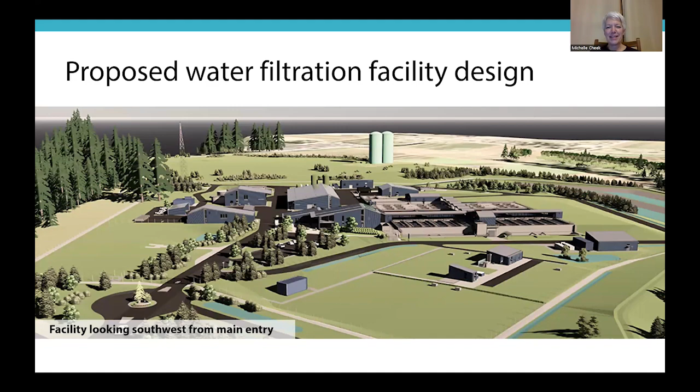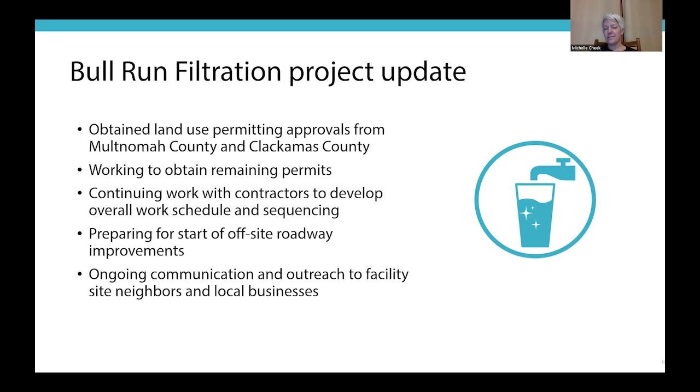And finally, we're committed to sharing information throughout construction, and we'll continue ongoing communication and outreach to keep facility site neighbors and local businesses informed about upcoming activities. So with that, I'll turn it over to Ben unless there's any questions. Cool, thanks, Michelle. Can we get that next slide, please?

So the beginning phases of construction, right now for the pipelines, you as neighbors probably won't see too much activity specific to the pipelines project, but for the filtration project in general, you will start to see some work happening out there. But specific to the pipeline construction, some of the things we're starting on now, we're going to be working with the utilities out there, such as PGE and Ziply and various other agencies, to identify where their existing facilities are, to confirm that there are no conflicts with our proposed pipelines route.

We'll also be completing some improvements that are described in the land use permit conditions of approval. One we're dubbing the Fix It First roadway improvements.

Sorry, can you go back to that, Aubrey? Sorry. Yes, sorry about that.

No worries. The Fix It First is, I'm sure everyone here has the land use conditions of approval. Within them, we agreed to start work on some of these roadways that are not up to standards to be able to handle construction traffic, as well as trying to improve the roadways before we get out there and do our work. And the other first set of improvements is the Carpenter Lane roadway improvements. That's probably the most visible thing the neighborhood will see as we begin our construction.

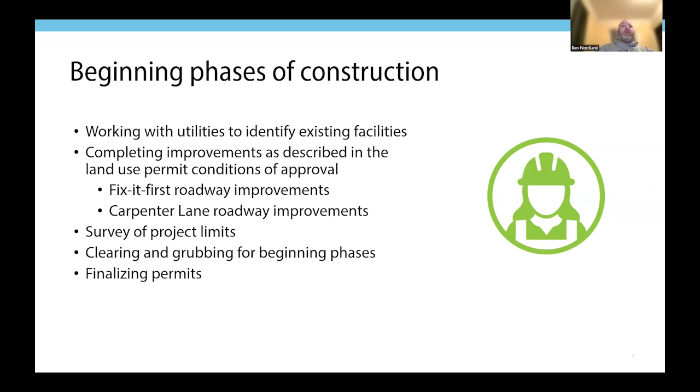Some of the other activities for the pipelines construction: we'll be out there surveying limits of the project, delineating where certain easements are, where the right of way is. During construction, we really like to stress that the contractors should stay within the limits that we've agreed upon, so survey really helps with that. You may see some clearing and grubbing, some tree cutting, tree trimming, removal of shrubs and stuff like that that may be impacted by the work as we progress, as well as working with the various agencies that we have to get permits from before we're allowed to do construction. Next slide, please.

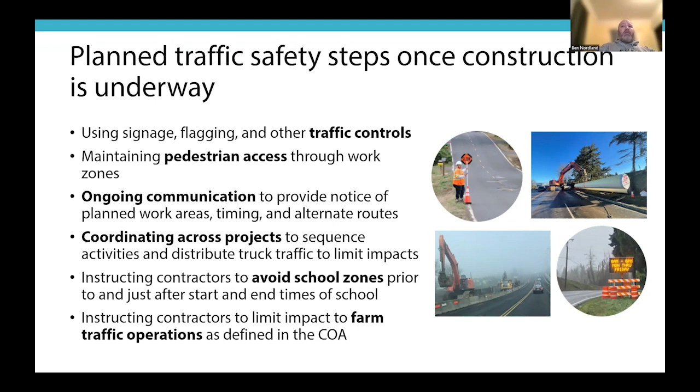Thanks. And that was going to be the end of the pipeline stuff. Unfortunately, we're not really doing too many activities. I was going to segue to stuff that's more specific to the facility. On the next slide, I'll do my best to cover for my counterpart. Next slide, please, Aubrey.

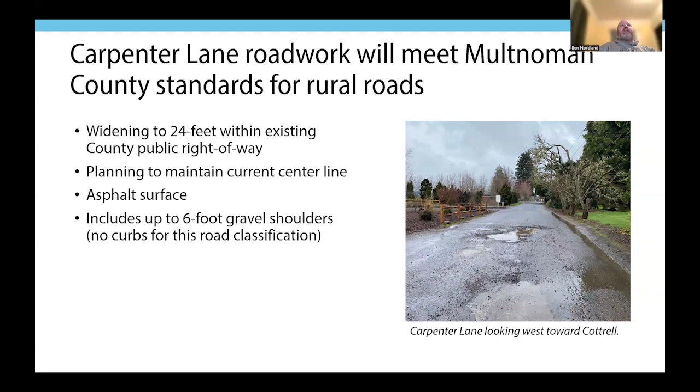Some of the most impactful stuff you'll see is the work that's starting on Carpenter Lane. One of the conditions the county set is that if you're going to have construction equipment, as well as future use of the facility, Carpenter Lane needed to be improved so the roadway can last its design life. So we'll be widening the roadway surface to 24 feet. It will maintain the same alignment. The county will help us make sure it is up to the standards they've dictated to us. At the end, it'll be a new asphalt surface. We'll also have gravel shoulders as well as stormwater improvements to help the drainage in this area. Next slide, please.

There'll be removal of trees and vegetation that's conflicting with what's in the roadway, and coordinating with utilities as well as all the services that everyone uses out there, including their mail service, their garbage service, and various other utilities and services. And then after everything's coordinated, we'll begin the construction.

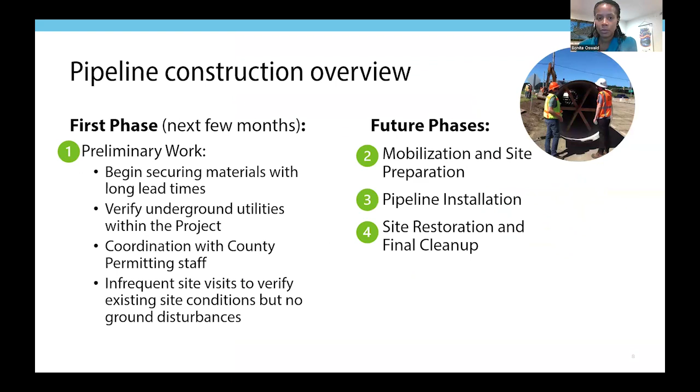Any other questions? You've got the chat you can use. Looking for hands, virtual hands. You can come off of your mute, turn on your video. Scanning through the list to see if there's anybody doing that.

Feel like I need some waiting music, like Jeopardy or something. I'd sing for you, Bonita, but you don't want to hear that. One day. Right.

There's no other questions. Again, we do post these videos and slideshow minutes to our website. So if you think of something later, feel free to reach out. But I guess that brings us to the end of this meeting.

And I want to encourage you to sign up for our e-news. Even if you're already signed up, please go back and check your preferences again, because we are making some changes to our e-news server and we'll be offering text alerts through that service as well. So if you would like text alerts, please use that to sign up. And there's a web address down there that also will take you to updating your preferences, or in any emails that you get from us, there's a little box at the bottom that allows you to update your preferences.

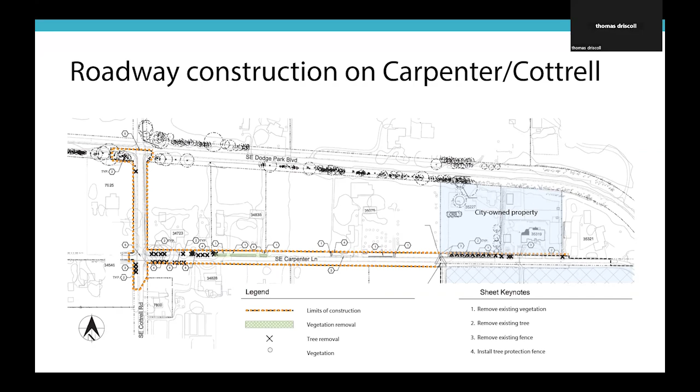Oh, did I hear someone? Can you hear us? Oh, yes, Thomas. Okay. Yes, I can hear you now. So I was looking at the roads. You had the one coming in on Carpenter Lane. Yeah. Okay, let's go back up a little bit, Aubrey. So is there another one coming down onto Bluff Road? There you go.

There is one more road that's coming down to Bluff Road. That's going to be developed a little bit later, but it's not going to be a road that we use for construction. That's going to be a road that we will use as an emergency access to the filtration facility once it's in operation. Okay. But will there be one into Bluff Road eventually? Yes, eventually. So that will just be an emergency access. It's the red line that's on this map. And that's right coming down beside the school up there. That's correct. Okay. Thank you.

Any other questions while we're on that slide, or in general? Oh, okay. Don't see any more.

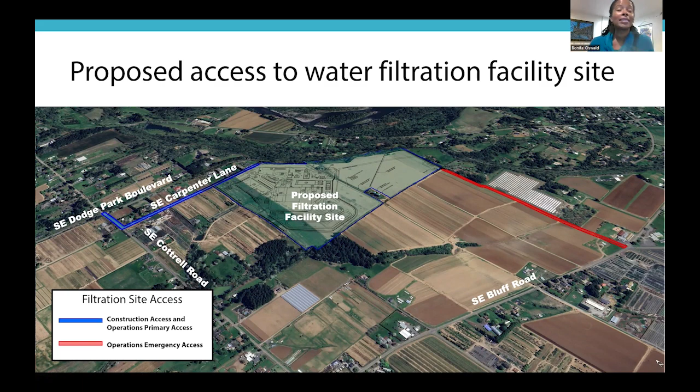I see Dean and Pat wishing us good luck with the snow. We hope you all have safe travels too in that snow. Hopefully you don't have to travel much in it.